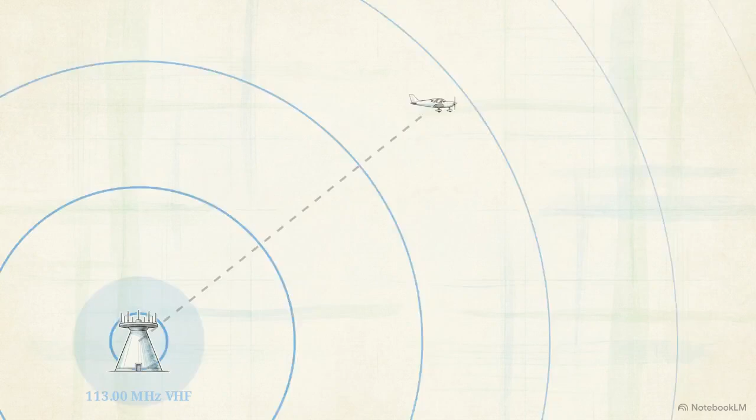While GPS has become the primary navigation tool for modern aviation, VOR remains the mandatory redundancy. If satellite signals fail or are jammed, pilots must fall back on this ground-based network. It forms the basis for all instrument orientation training. The challenge is understanding exactly how an aircraft's receiver can capture invisible, omnidirectional radio waves and convert them into precise, absolute positional data on the instrument panel.

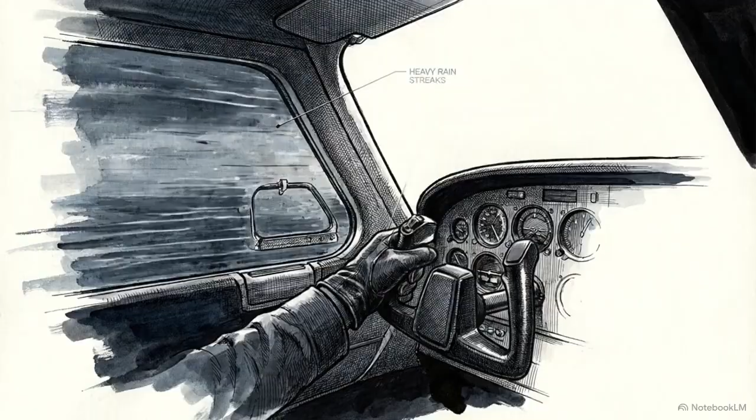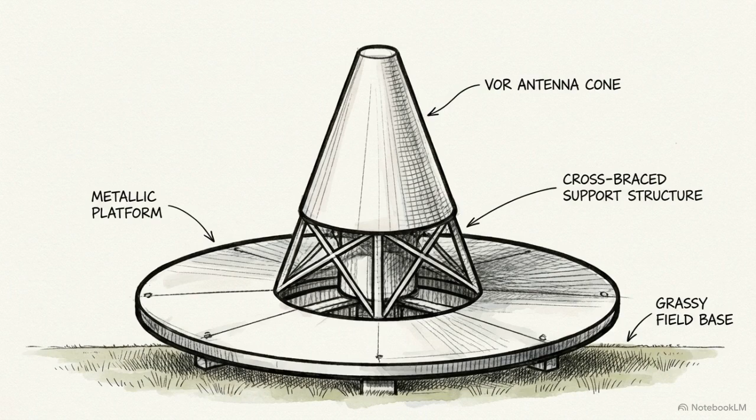Navigating by VOR requires a mastery of applied physics and spatial geometry, a technical baseline that remains a requirement for professional airmanship. To see how that positional data is generated, we have to look at the ground station itself. It transmits radio signals in all directions, but each specific direction carries its own unique electronic signature.

This signature is created by broadcasting two distinct VHF signals. The first is the reference phase signal, which radiates outward as an omnidirectional wave, pulsing identically in all directions. The second is the variable phase signal. This acts like a lighthouse beam, rotating continuously at a highly precise rate of 1800 revolutions per minute.

By comparing the phase difference between these two overlapping signals, the aircraft's receiver calculates its exact position relative to the station. As a baseline, when the aircraft is located exactly due north, at magnetic north, the receiver detects both the reference and the variable signals perfectly in phase. Their wave peaks align exactly. But as the aircraft moves to magnetic east, the physical rotation of that second signal introduces a mathematical delay. At exactly 90 degrees east, the receiver detects that the sine waves are precisely 90 degrees out of phase.

These individual directional signals are defined as radials. You can picture them as absolute position lines projecting outward from the station, like spokes extending from the hub of a wheel. The system generates 360 distinct tracks, separated by single degrees. When operating normally, every single radial is transmitted to an accuracy within plus or minus 2 degrees.

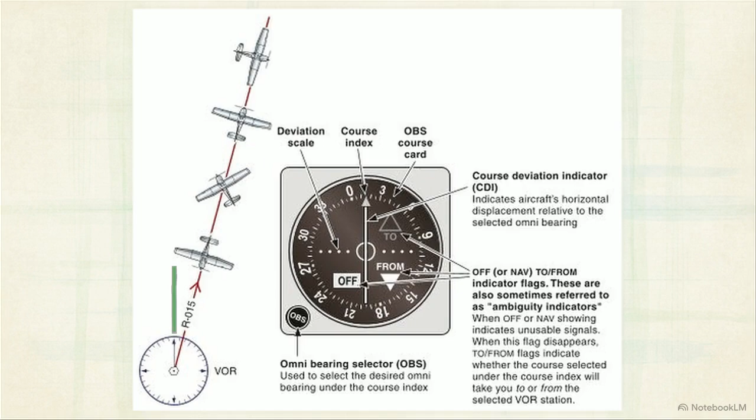In real time, the VOR receiver solves this complex physics problem. It transforms the raw data into an absolute, reliable magnetic position line. This image displays the omni-bearing indicator. To decode those invisible radio waves into something a pilot can actually fly, the raw phase data has to be translated into this physical instrument on the panel.

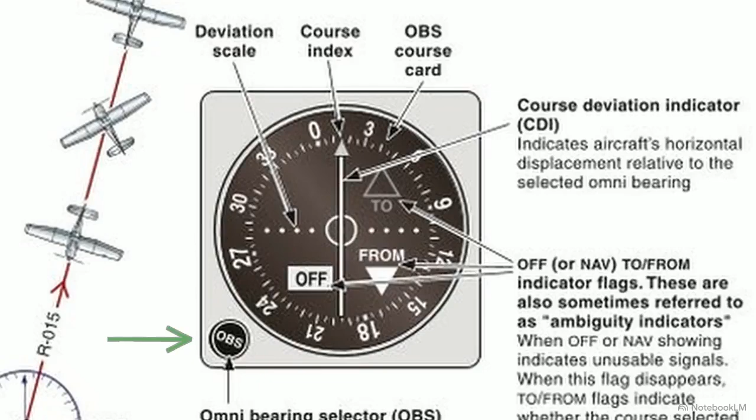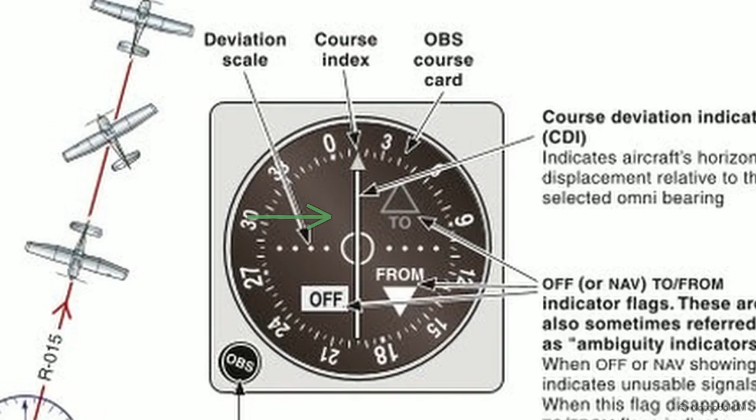The interface begins with the Omni-Bearing Selector, or OBS knob. The pilot turns this knob to rotate the course card, dialing in the specific radial they intend to fly. Once a course is selected, the course deviation indicator, the vertical needle in the center, provides a mechanical line showing the aircraft's horizontal displacement from that exact radial.

There is a critical law of VOR navigation at play here. The CDI does not show a fixed linear distance in feet or miles. It displays angular deviation from the station. Look at the deviation scale on the instrument face. Each horizontal dot extending out from the center circle represents exactly 2 degrees of course error. If the needle hits full-scale deflection at the 5th dot, it indicates the aircraft is off course by 10 degrees or more.

Because the deviation is angular, it creates a funneling effect. At 30 nautical miles from the ground station, a 1-dot error on the instrument equals a physical offset of 1 nautical mile. But the physical distance off course widens the further away you get. At 60 nautical miles out, that exact same 1-dot deviation equals a physical offset of 2 nautical miles.

This geometric relationship perfectly mirrors the aviation 1-in-60 rule that pilots use for mental navigation math. The instrument acts as an angular geometry translator, converting complex phase angle math into a simple visual interface.

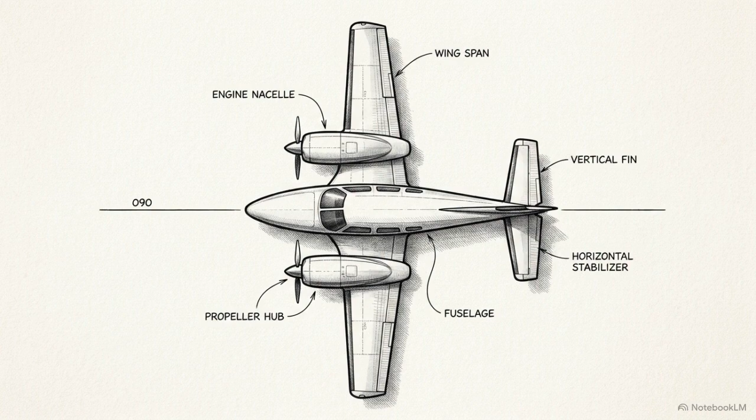If the needle doesn't account for heading, how does the pilot know if following the selected course will take them toward the station or further away from it? The mechanical solution to this directional ambiguity is the to/from flag located right on the instrument face.

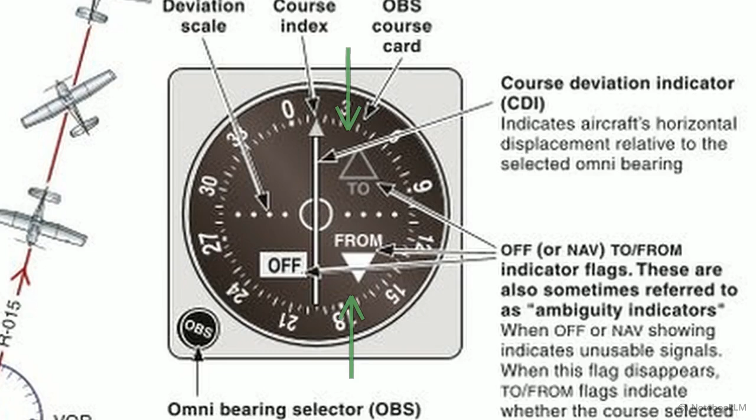The logic is straightforward. If the aircraft is physically positioned on the 090 radial and the pilot selects 090 on the dial, the flag will read FROM. Flying a heading of 090 will take the aircraft away from the station.

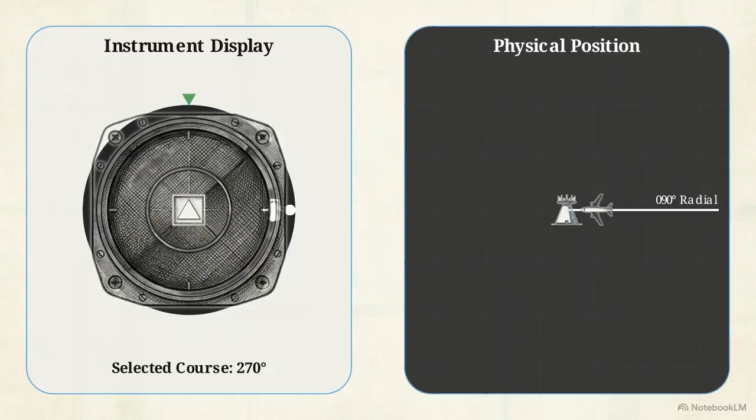Conversely, if you leave the plane in the exact same physical spot but dial the reciprocal course of 270, the flag mechanically flips to TO. The to/from logic separates the concept of heading from position, allowing pilots to orient themselves in space without directional confusion.

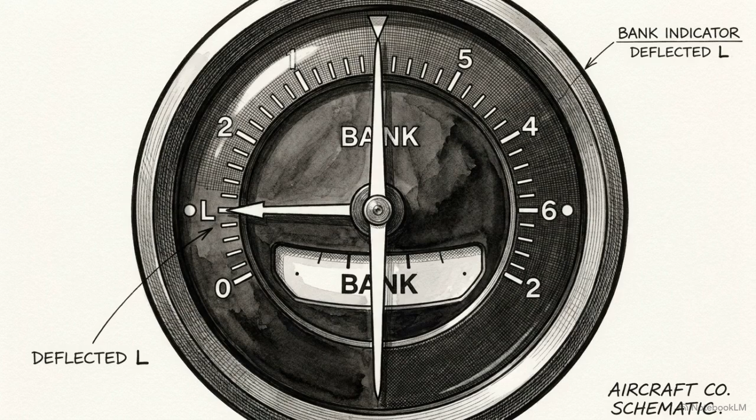Even with the to/from flag, the standard display has a human factors flaw. If a pilot flies a reciprocal heading opposite to their selected course, the instrument suffers from reverse sensing. In a reverse sensing scenario, the needle deflects in the opposite direction of the desired track.

The pilot is forced to manually reverse their physical control inputs, steering away from the needle to center it, which induces intense cognitive load. This diagram illustrates the Horizontal Situation Indicator, or HSI.

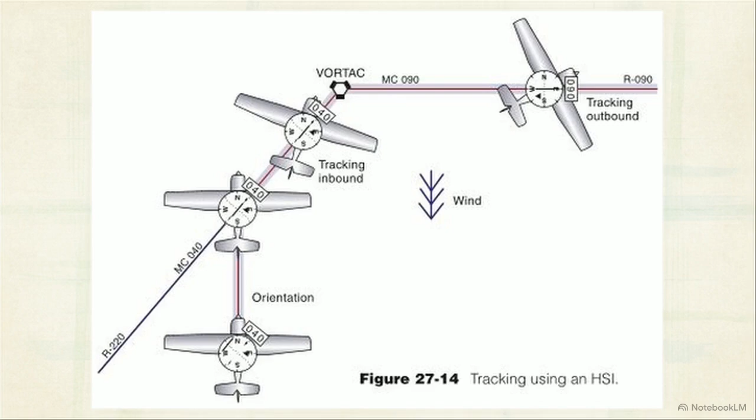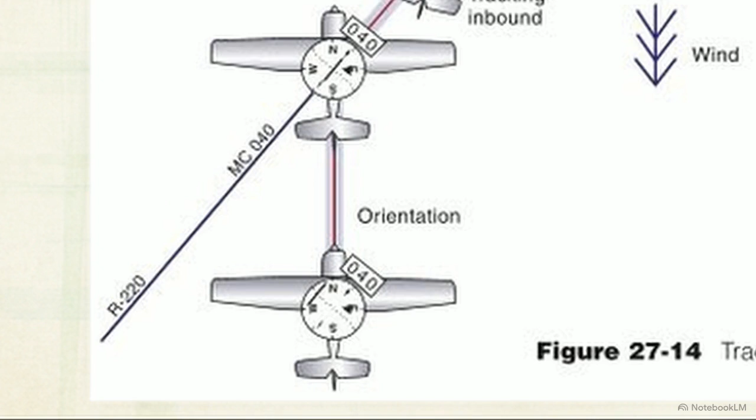It is a mechanical evolution explicitly built to eliminate reverse sensing. The HSI integrates two functions. It takes the VOR deviation needle and superimposes it directly on top of a remote indicating compass card. Because the compass card automatically rotates as the aircraft turns, it constantly aligns the entire VOR display with the aircraft's actual magnetic heading.

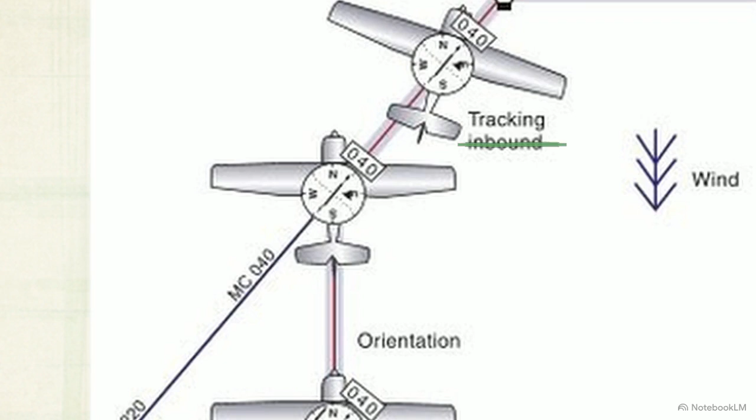Look at the inbound tracking maneuver shown here. As the aircraft turns toward the station, the instrument physically maps the selected course relative to the miniature aircraft icon in the center. The needle stays on the correct physical side of the aircraft. Thanks to this automatic rotating link, the needle always points toward the selected course line.

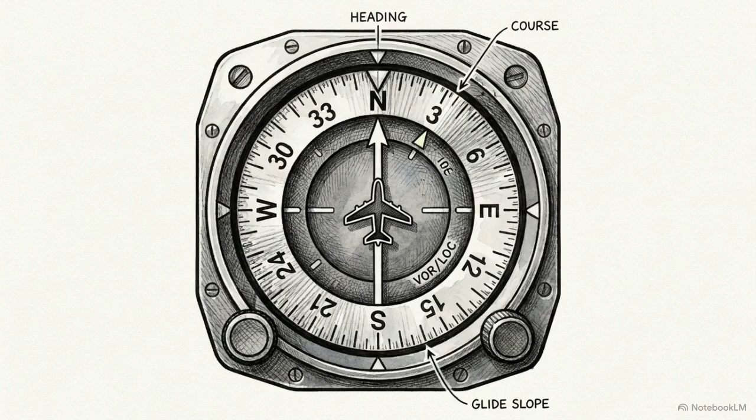There is never reverse sensing on an HSI. It completes the evolution of radio navigation in the cockpit, turning a static mathematical readout into a dynamic command instrument that aligns with the pilot's perspective.

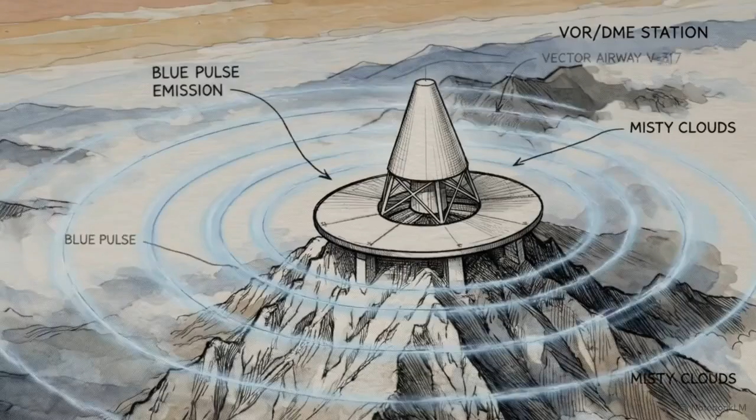The entire VOR architecture is an exercise in applied physics. A ground station sweeps a variable phase wave, a receiver calculates the angular offset, and an HSI commands the spatial geometry to the pilot. Because IFR flight stakes lives on the accuracy of this invisible grid, the FAA requires rigorous, logged operational checks of the receiver before entering the clouds.

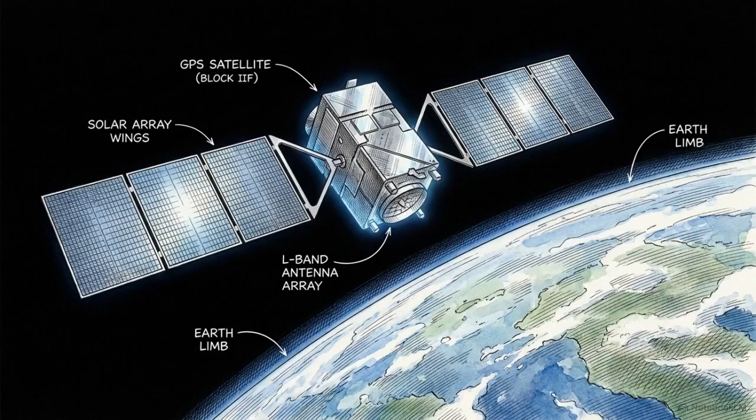You must also tune the frequency and listen for the precise Morse code identifier. Until that code is positively identified and the off flag disappears from the display, the instrument's geometric output cannot be used. Satellite architectures represent the future of navigation, but the ability to translate phase physics into precise movement remains a required skill for any instrument-rated pilot.